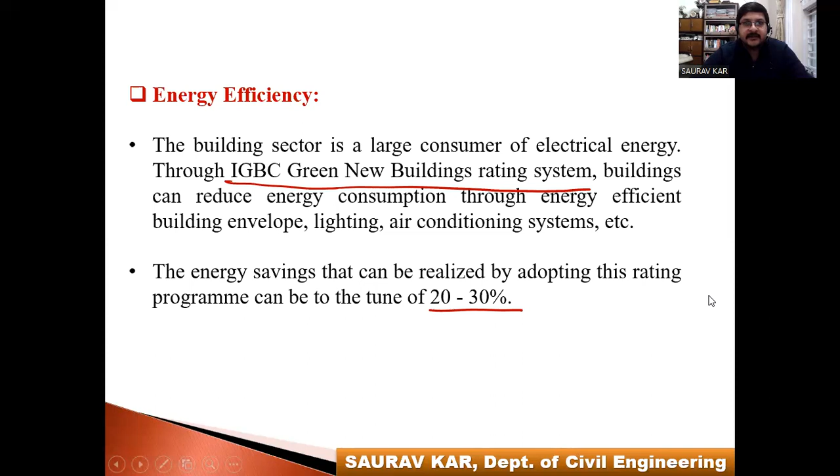So, energy efficiency: 20 to 30% energy savings can be achieved through this.

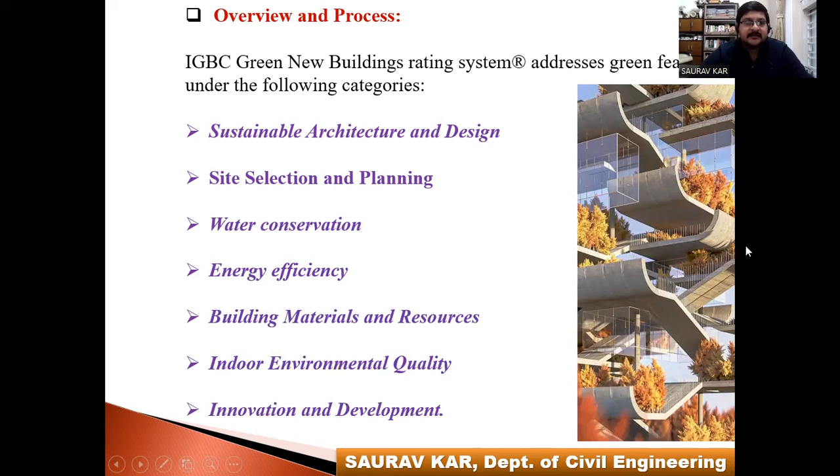Next we have the new rating systems. All the important issues I discussed last day, we will learn in detail. Sustainable architecture I already discussed last day - this is the IGBC, or Indian Green Building Council, rating system.

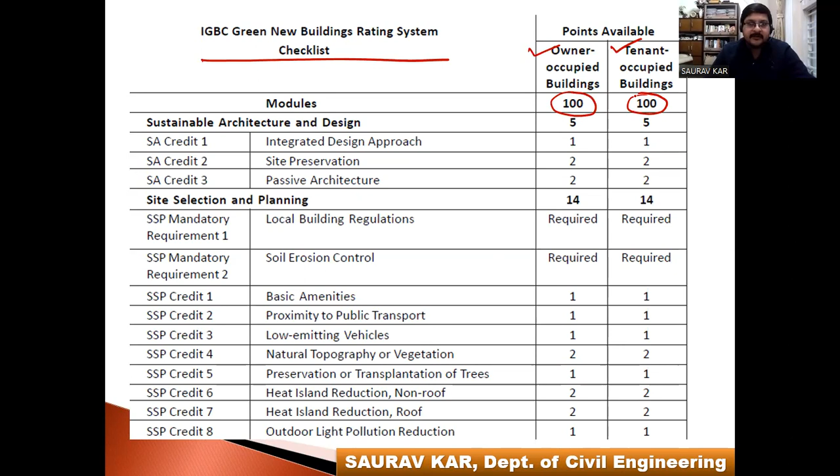One rating is for owner-occupied buildings and one for tenant-occupied buildings, with 100 points each. Owner-occupied building means the normal residential building or flat complexes which are very prominent, and tenant-occupied buildings refer to offices. They have not demarcated by other uses like residential, commercial, or educational - they have only classified into these two groups. So offices come under tenant-occupied buildings.

Since we are learning about buildings and infrastructure, we will be focusing on those issues.

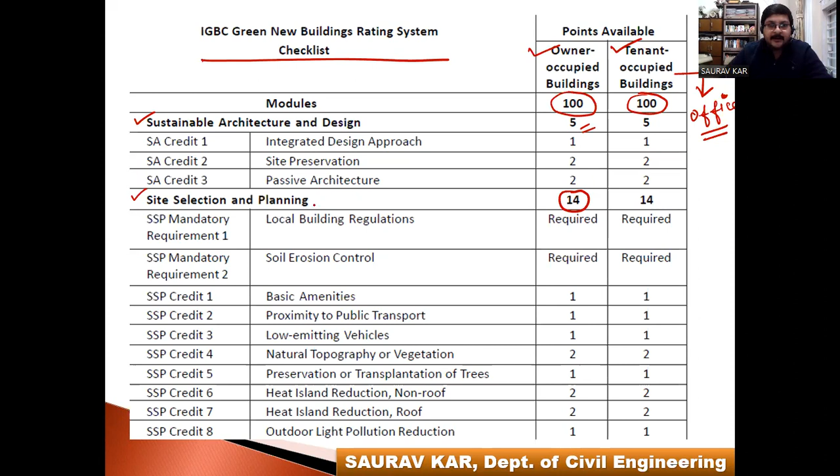Sustainable architecture and design has a 5 point distribution. A huge area to score marks is site selection and planning, where a maximum of 14 points can be credited on this issue.

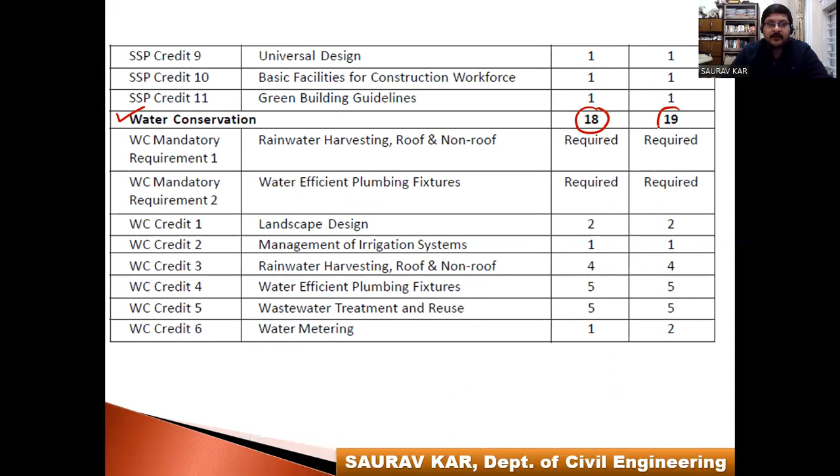Water conservation is another area where people can score a huge amount - 18 or 19 points in tenant-occupied buildings.

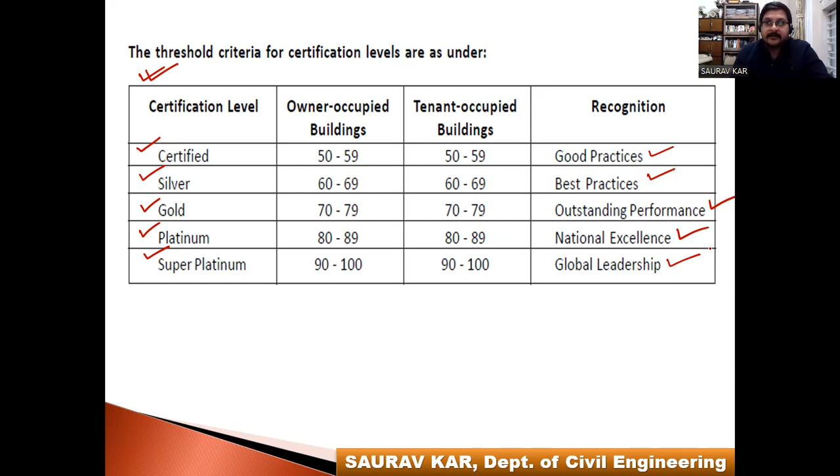Now coming to a very important thing - what is the importance of green buildings? As I already told you, buildings represent a very polluting sector, from the construction of houses and tertiary buildings through their occupancy and use. They represent a considerable amount of resources and energy.

So the energy consumption by buildings can be addressed in two types of energy - how much energy we are wasting or consuming on buildings can be calculated. Those learning sustainable construction materials, which is an elective subject - a very nice subject I teach at my institute - we learn how to calculate how much energy is consumed by buildings, or how much energy is consumed for the utilization and production of building materials.

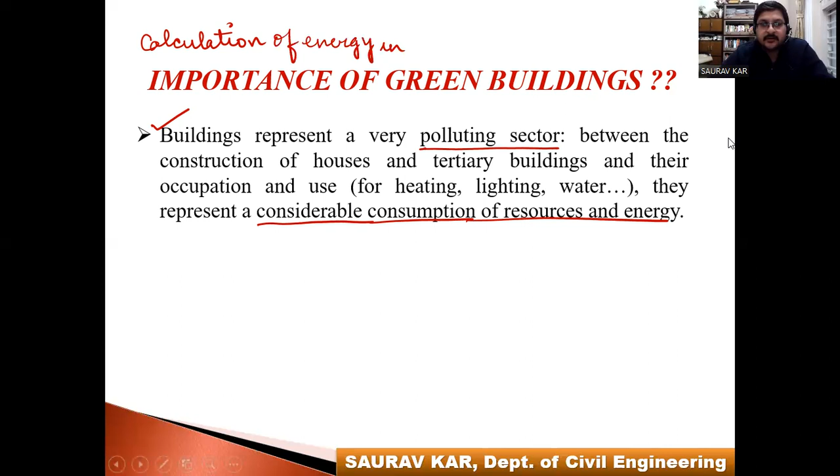The calculation of energy inside the building, when we talk about calculation of energy inside buildings, is known as operational energy. So, calculation of energy in buildings is known as operational energy. That means how much energy we are utilizing during the operation or performance of the building - when we are occupying and utilizing the building. So how much energy is consumed in the form of any item - it can be electricity, water, fuel, or natural gas.

So the calculation of energy in buildings can be of two types. First is operational energy, and another type is the energy we calculate for manufacture and production. Another calculation we do is for manufacture, production, and transportation to site.

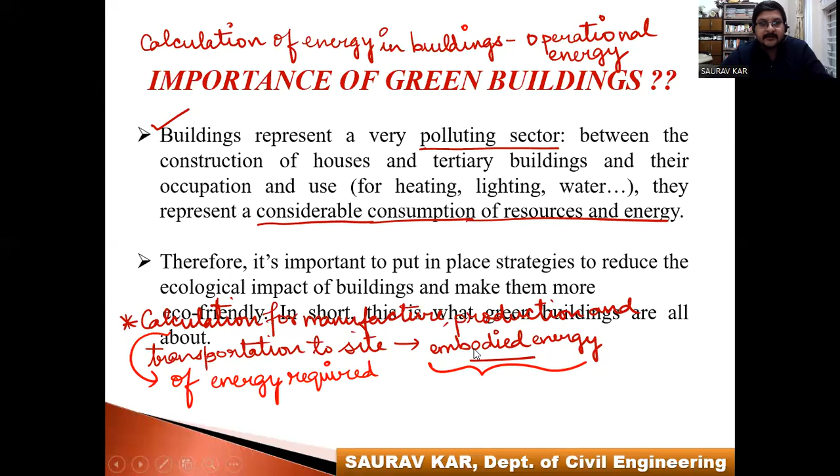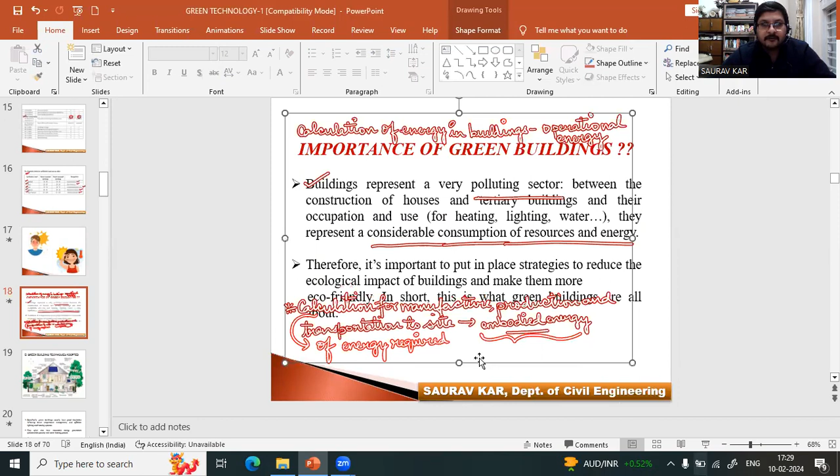So in short, the impact of green buildings is very popular. This impact of green building is very popular. Now let me come to the thing I was discussing - the green building techniques that are adopted.

Very interesting - let me see effectively what are the various components of green building that are adopted. Techniques, as well as I will say components. Various green building components. The components in green buildings.

Component means, what are the individual parts - maybe natural, maybe artificial - that need to be incorporated in a particular green building, so that I can say yes, this building can be termed as a green building to some extent.